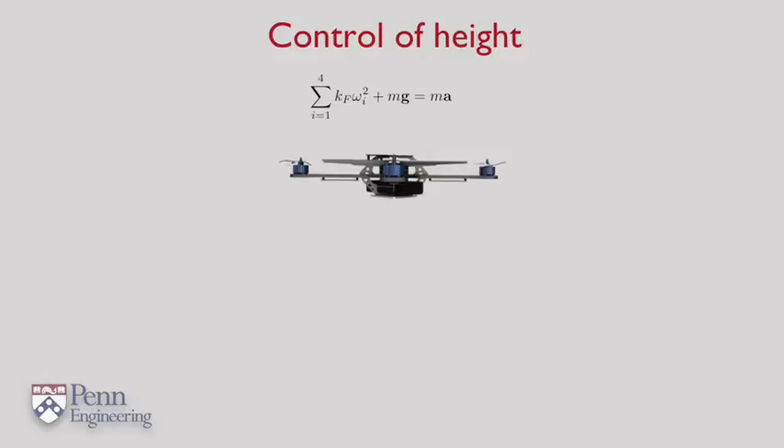Now let's talk a little bit about control. Again, I'm going to focus on the vertical direction. So let's think about controlling height. What you'd like to do is drive the robot to a desired vertical position, either up or down. Let's use x to measure the vertical displacement.

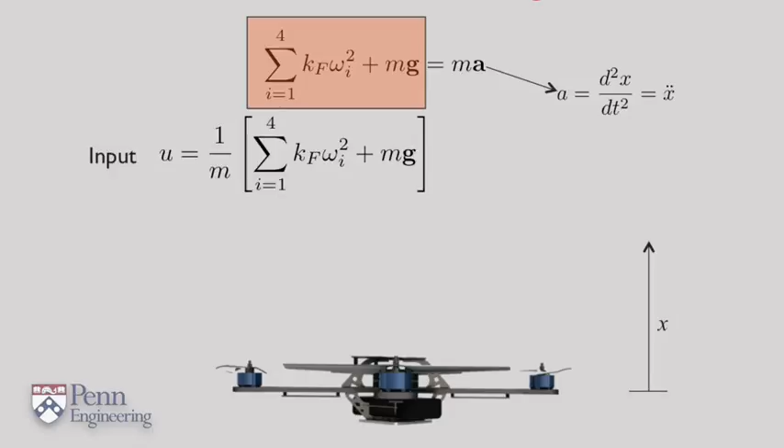Clearly, the acceleration is given by the second derivative of position. If you look on the left-hand side, you will see the sum of the forces. Let's call U the sum of the forces divided by the mass. So you have now a very simple second-order differential equation with an input U and a variable x, such that U is equal to the second derivative of x. Our goal to control this vehicle is to determine the function U such that the vehicle goes to the desired position x.

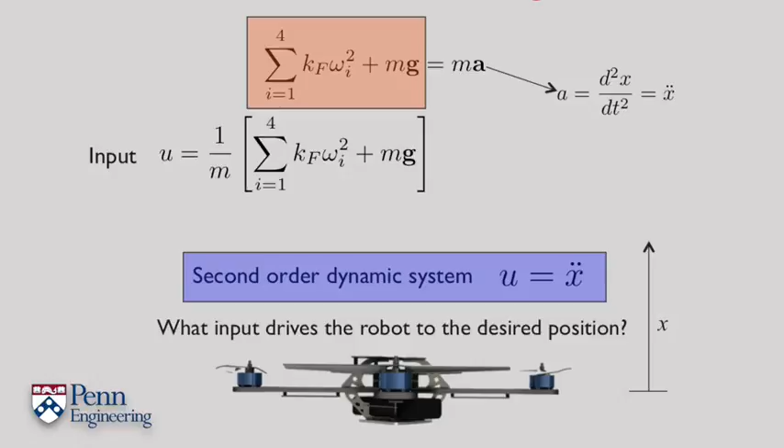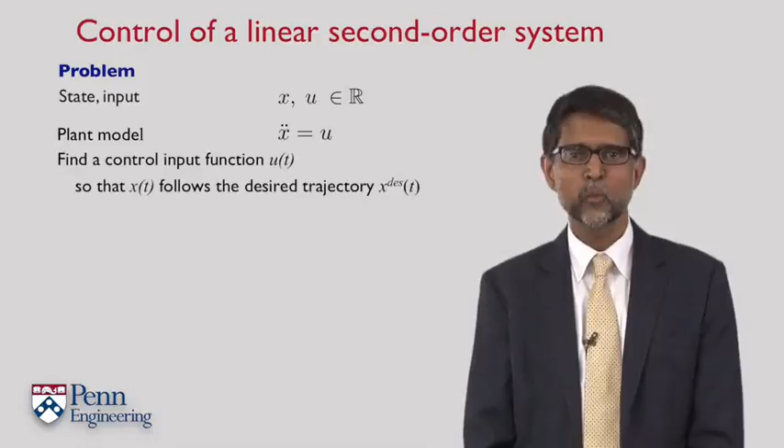So here's the control problem. The system we have is a very simple system. It's a second-order linear system. You're trying to figure out what U of t, what function of t that is U, drives x to a desired position, x desired. If you have a desired trajectory, in other words, x desired as a function of time, you want to synthesize the control input U of t that allows the vehicle to follow the desired trajectory.

In order to do that, let's define an error. The error function is essentially the difference between the desired trajectory and the actual trajectory. The larger the error, obviously, the further the deviation of the actual trajectory from the desired trajectory. What you'd like to do is take this error and decrease it to 0. More specifically, we want this error to go exponentially to 0.

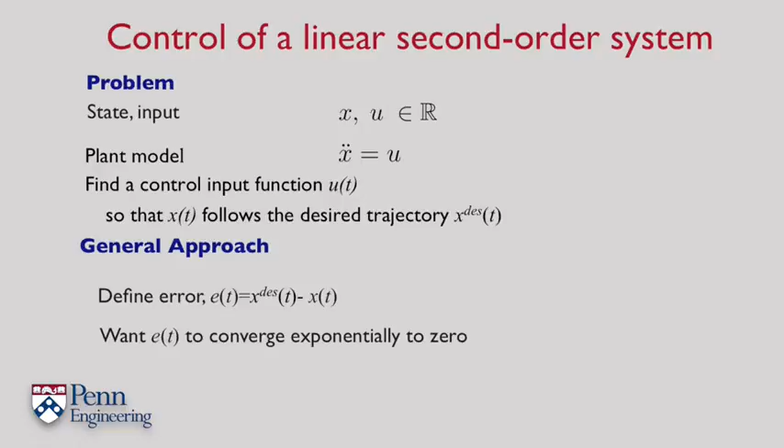In other words, we want to find U of t such that the error function satisfies the second-order differential equation. Why this differential equation? Well, in this differential equation there are two unknowns, Kp and Kv. If I select appropriate values of Kp and Kv, more specifically, if I ensure that these values are positive, I can guarantee that this error will go exponentially to 0.

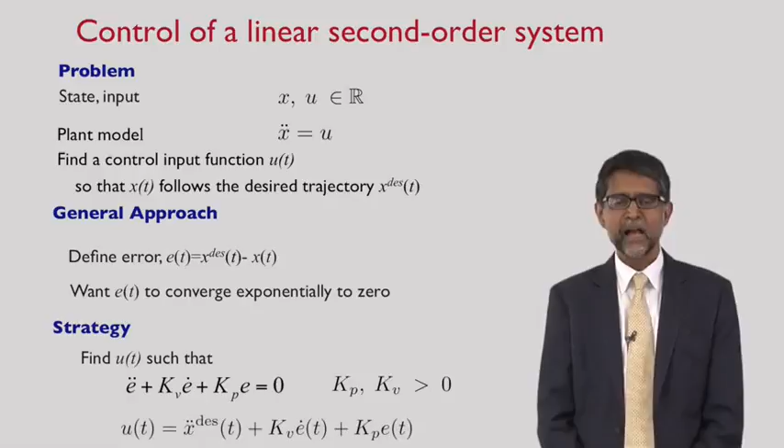The control input that achieves that is given by this very simple equation. Again, the only reason I'm pulling out this control equation is because I want the error to go exponentially to 0, and that'll ensure that x tends to x desired.

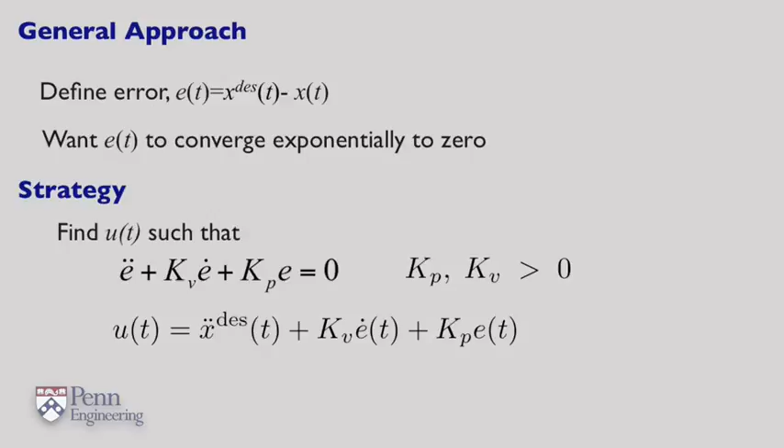There are two variables in this equation. One is k sub p, and the other is k sub v. You'll see that k sub p multiplies the error and adds the error times kp to the control function. K sub v multiplies the derivative of the error and adds that to the control function. So one is called the proportional gain, the other is called the derivative gain.

And in addition, you need some knowledge of how you want the trajectory to vary. So you're feeding forward the second derivative of the desired trajectory. This is often called the feed-forward term. And this completes your control law, or the control equation, that then you can use to drive your motors.

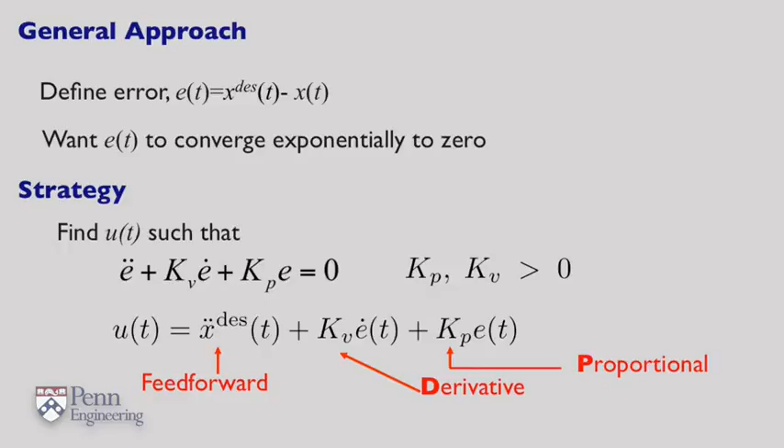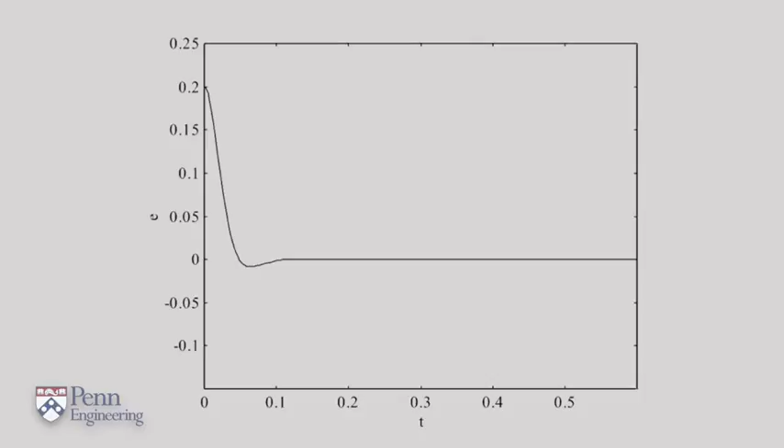Here's a typical response of what the error might look like if you use such an approach to control. The error starts out being non-zero, but quickly settles down to the 0 value. The error might undershoot, go from a positive value to a negative value, but eventually you're guaranteed that it'll go to 0. To summarize, we've derived a very simple control law.

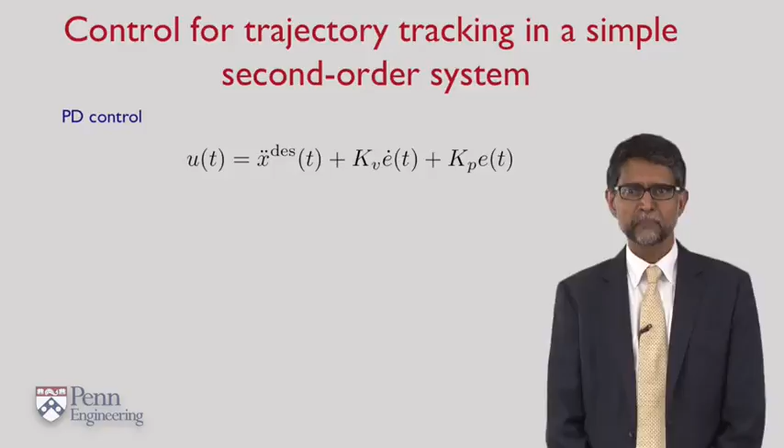It's called the proportional plus derivative control law, which has a very simple form. It has 3 terms, a feed-forward term, a proportional term, and a derivative term. Each of these terms has a significance. The proportional term acts like a spring or a capacitance. The higher the proportional term is, the more springy the system becomes, and more likely it is to overshoot. The higher the derivative term, the more damped it becomes. So this is like a viscous dashpot or a resistance in an electrical system.

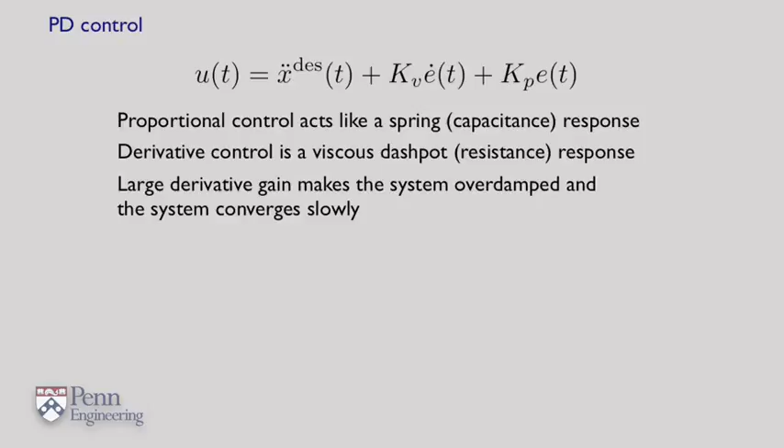By increasing the derivative gain, the system essentially gets damped, and you can make it over-damped so that it never overshoots the desired value. In exceptional cases, you might consider using a more sophisticated version of the proportional plus derivative control.

Here you have an extra term which is proportional to the integral of the error. You often do this when you don't know the model exactly. For instance, you might not know the mass, or there might be some wind resistance you need to overcome, and you don't know a priori how much this wind resistance is. This last term essentially allows you to compensate for unknown effects caused by either unknown quantities or unknown wind conditions or disturbances.

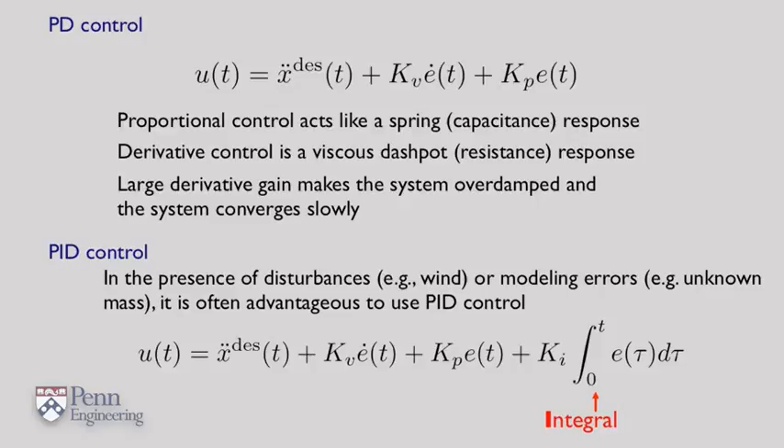The downside of adding this additional term is that your differential equation now becomes a third-order differential equation. The reason for that is you've suddenly added an integral in the mix, and if you want to eliminate the integral, you have to differentiate the whole equation one more time, introducing a third derivative. However, the benefit of this is that this integral term will make the error go to zero eventually.

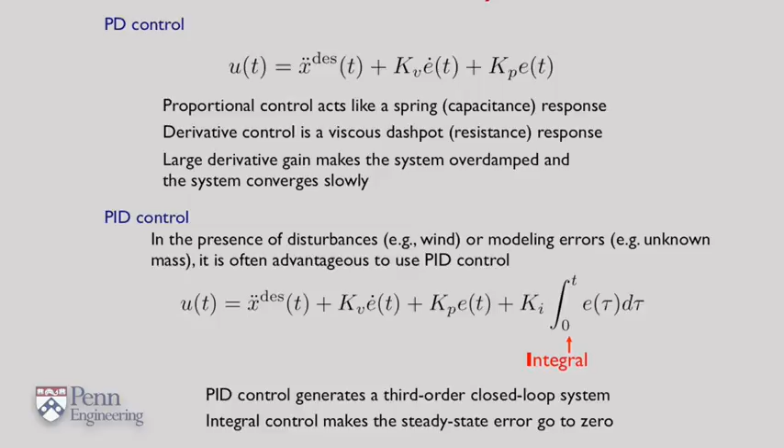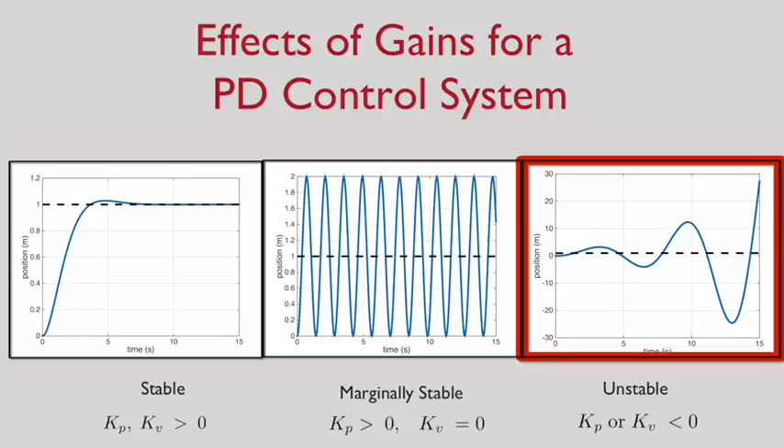You can similarly explore the effect of the integral gain, which we haven't done in this picture. I now want to deal with a complete simulation of the quadrotor.

Because we'll now require three independent directions, we're going to introduce x, y, and z coordinates, and this time the z coordinate points up.

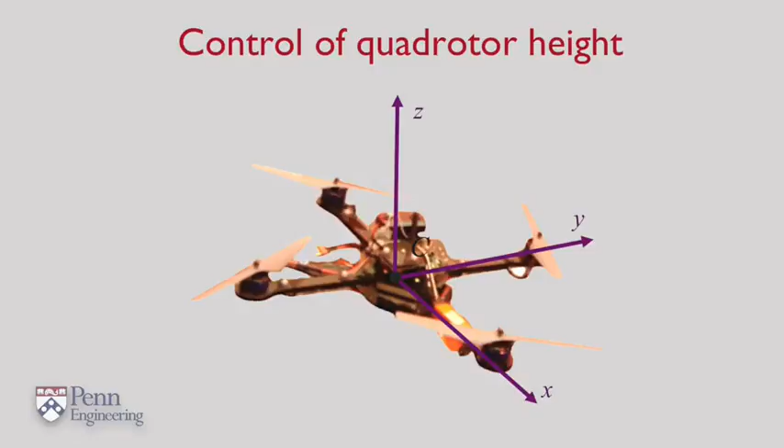So here's a simulation of the quadrotor, and again we're using a proportional plus derivative control to control height. For the moment, we're ignoring the other variables. We're adding terms to make sure the lateral displacement is 0, the roll and pitch stays 0, and the yaw stays 0. But we don't have to worry about that for the present moment. We're only considering the proportional plus derivative control of height.

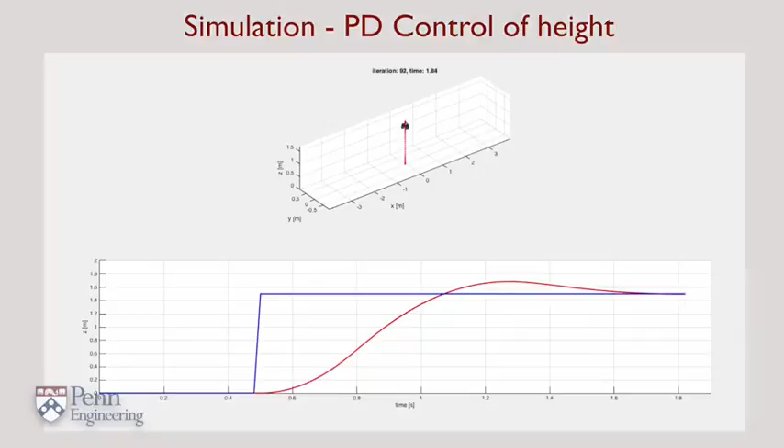And you can see that the error starts out being non-zero and then eventually settles down. There's an overshoot. The red curve overshoots the desired blue curve, but eventually settles back down so that the red and the blue curve coincide.

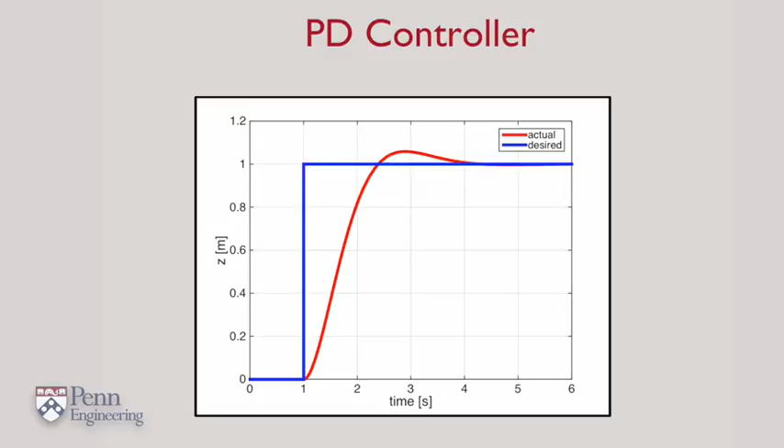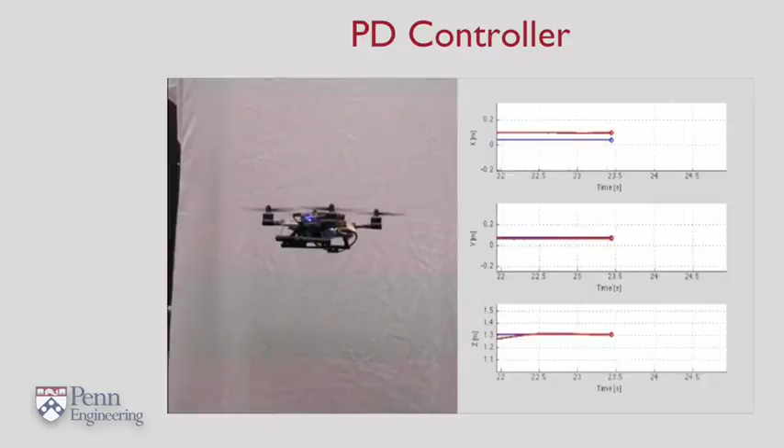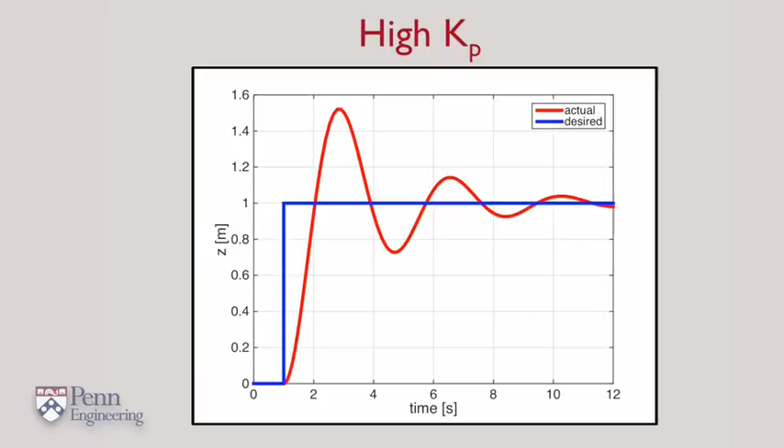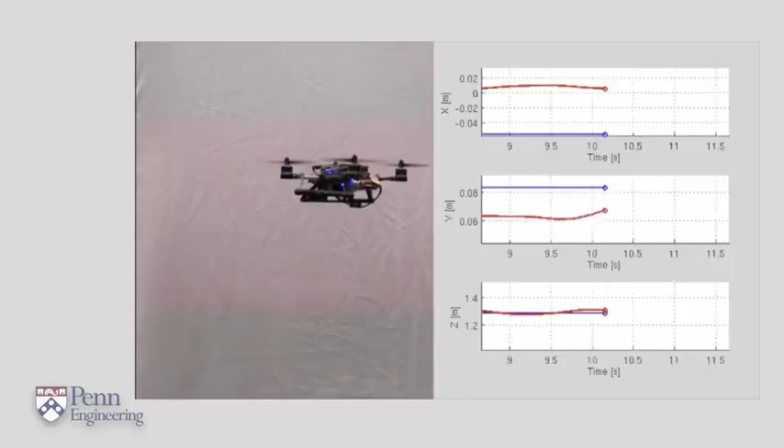Again, in this video, you'll see the same phenomenon. The robot is hovering, but when it recovers from the displaced position, it overshoots and comes back to the original position. This happens because the proportional gain has been increased.

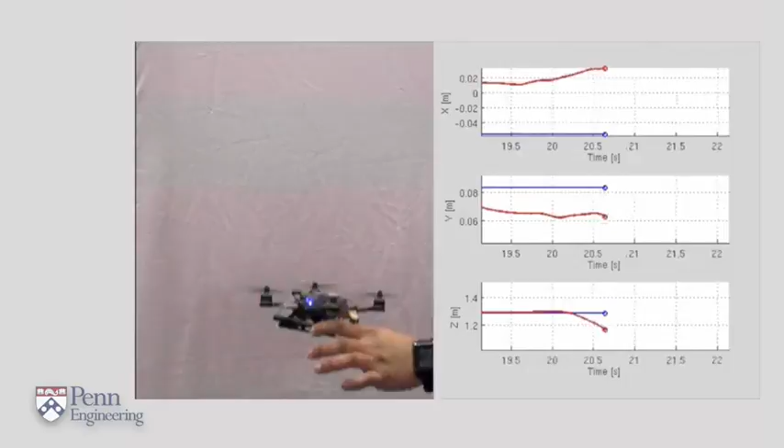If you turn down this proportional gain, you lose the overshoot, but instead you get a very soft response.

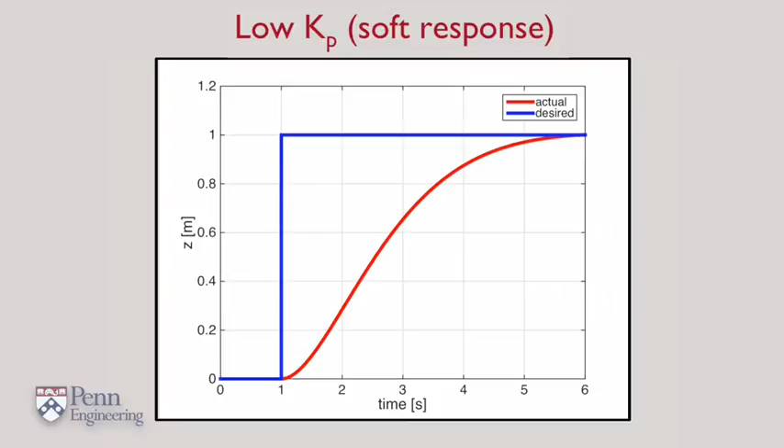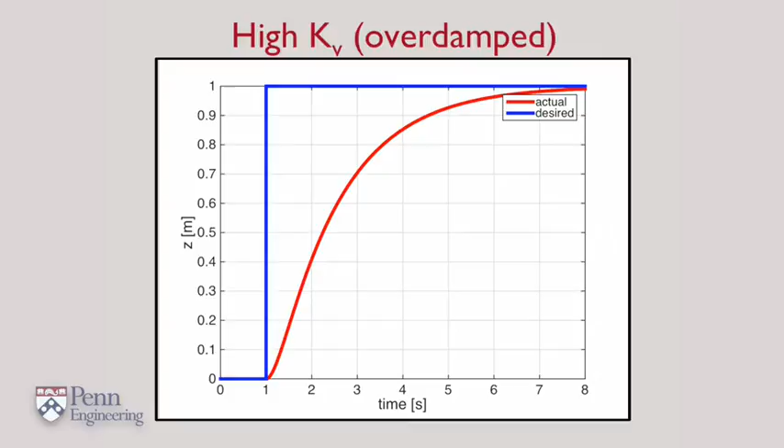And once again, this video illustrates this. The vehicle is displaced, and it takes a longer time to get back to the original position.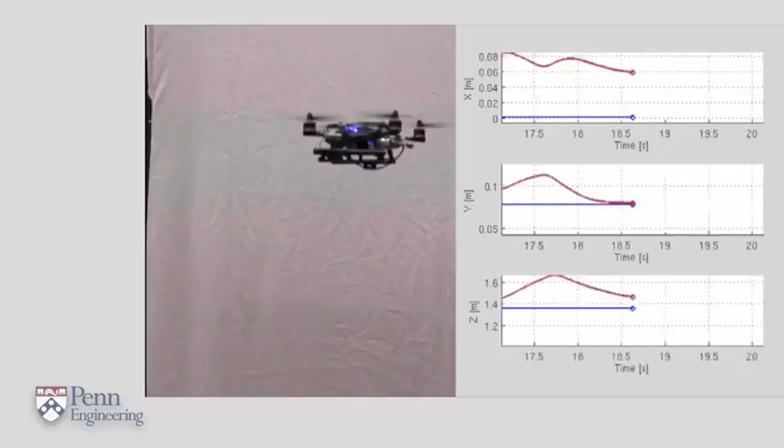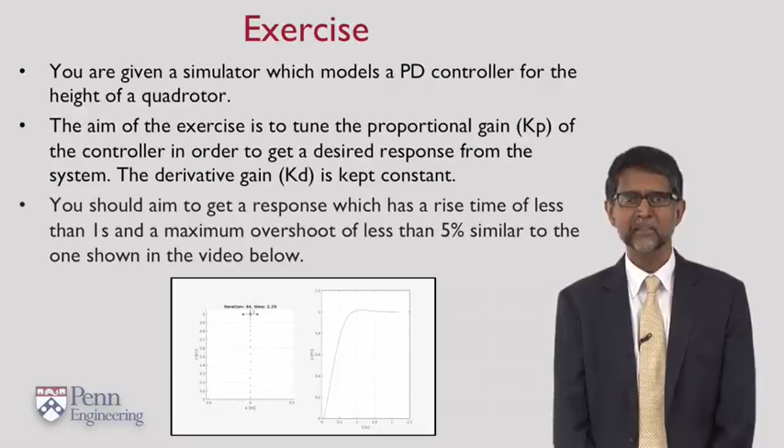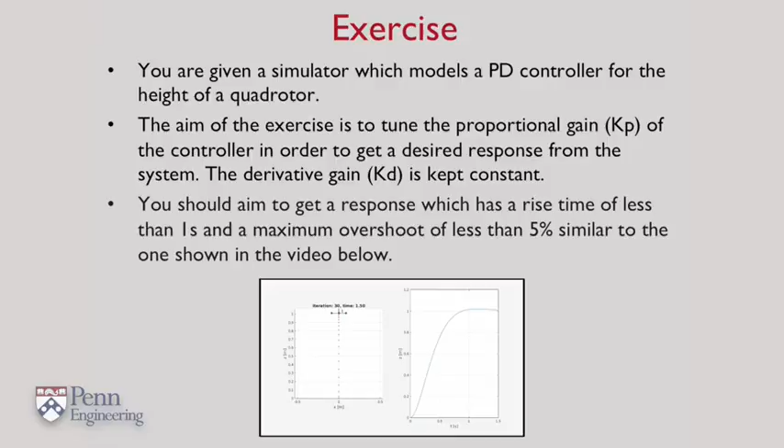In order to get a feel for these different terms in the controller, here's a simple exercise. You have a simulator of the system that you just saw. Try to play around with the two gains k sub p and k sub v to achieve a simple goal, which is to get a desired response in which the rise time, in other words the time taken to get to the desired position, is reasonably short, and the overshoot is kept below some modest value.